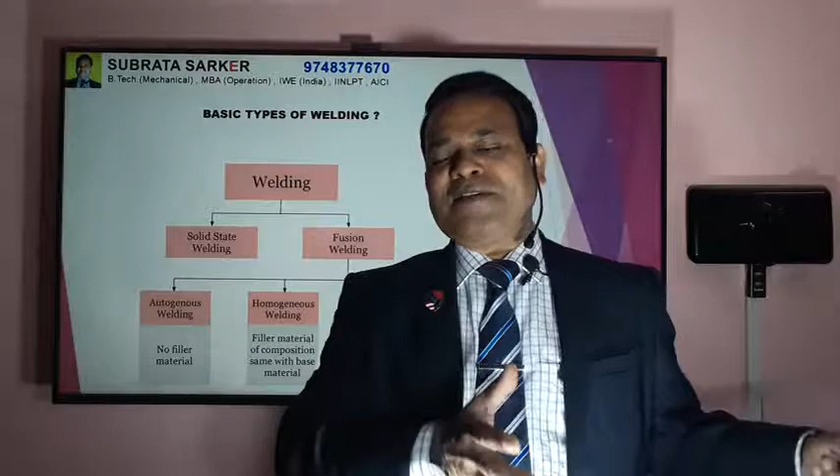Now welding has a lot of types actually, like solid state welding, fusion welding, heterogeneous welding, homogeneous welding, autogenous welding, and also there's non-metallic material like polymer material. It has also got different sub varieties for the welding process, which today we are not going to discuss. We'll be discussing only metallic material welding.

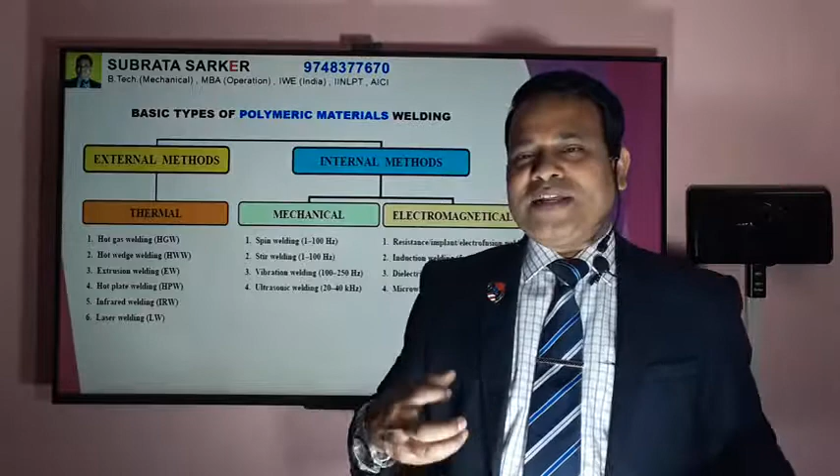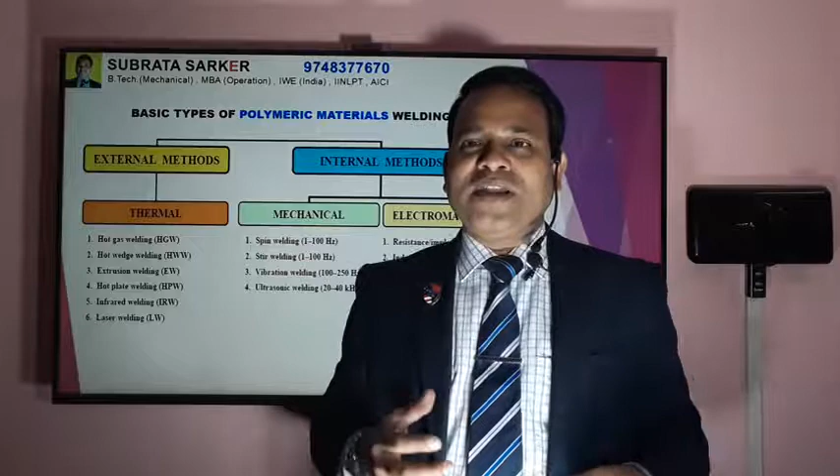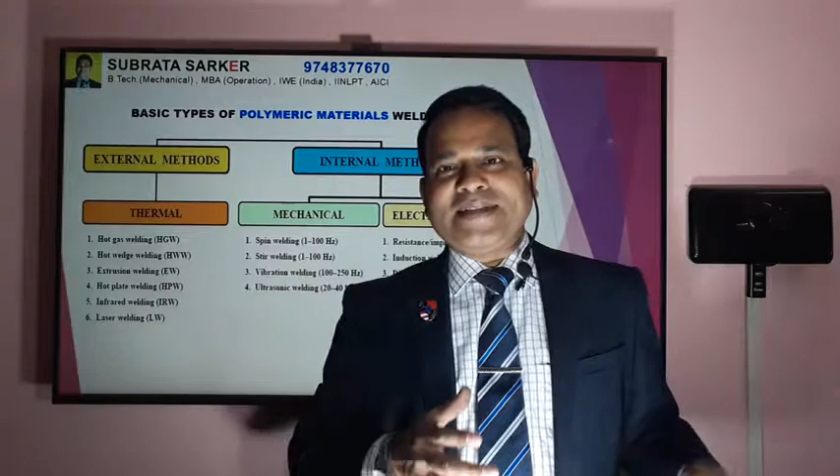Now basic types in metallic material welding: one is gas welding, which is mostly used for sheet metal where joint strength is not much needed, and resistance welding is also very much used for sheet metal applications in the automobile industry, and arc welding is majorly used in the fabrication industry for shipbuilding, for heavy construction, like MIG welding, submerged arc welding, etc. And there are newer welding processes like EBW, electron beam welding, and laser beam welding. This is the special area of application where this welding is used.

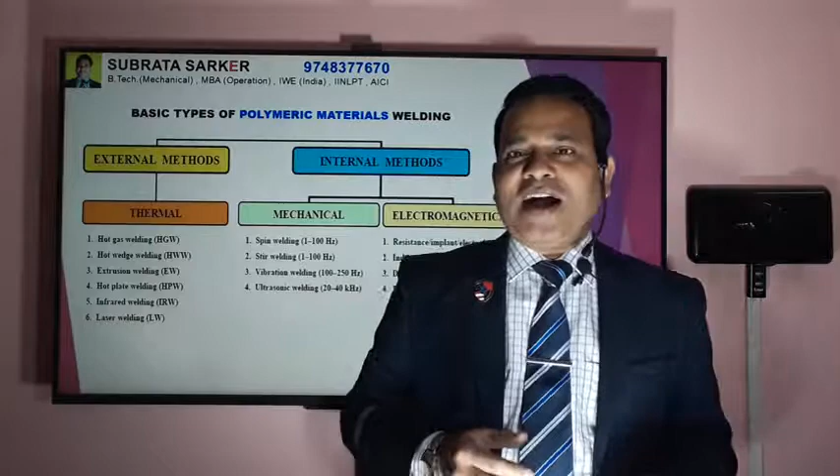And there is another category of welding, called solid state welding, under which comes friction welding, ultrasonic welding, diffusion welding, and explosive welding. I'll be discussing today in detail ultrasonic welding, which is basically a solid state welding.

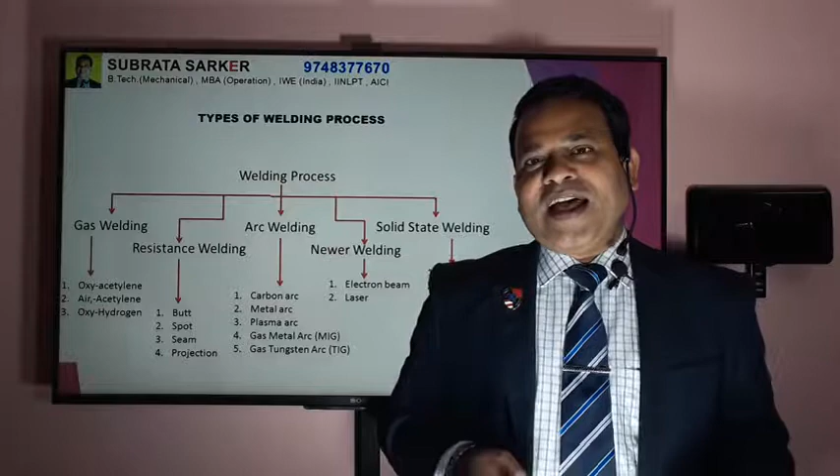Now, before getting into this subject, I would like to share that welding is one of my most favorite subjects among mechanical engineering subjects. Other than my engineering graduation, I have also done a section of BTech from Jadavpur University only on welding technology in collaboration with IIW, and I'm also an International Welding Engineer certified by IIW. And in one of my previous companies, when I was working in Germany, the name of the company was Ultrasonic GmbH, I learned a lot of special welding processes, like friction welding, submerged welding, laser welding, microplasma welding, ultrasonic welding. So today I'll share one of these areas, ultrasonic welding, which you will normally not find in common industry; it is a very special area of application and special category of welding.

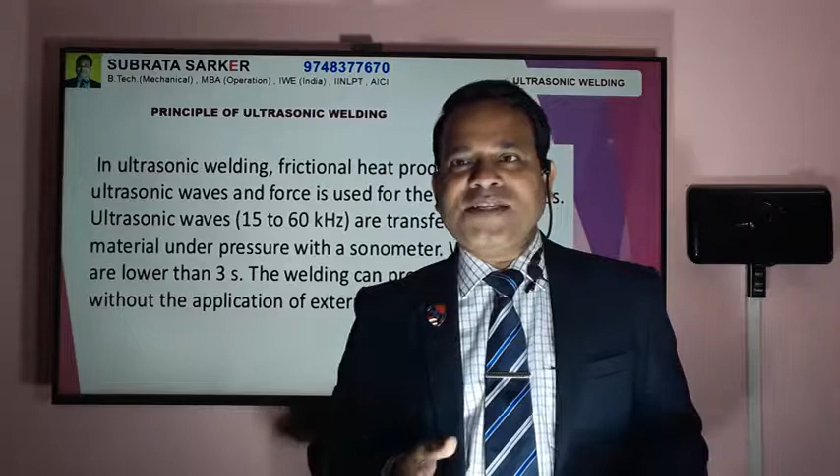And the typical things are a transducer which generates the vibration in the required range, a sonotrode that is needed for ultrasonic welding, an anvil or jaw, etc. So the process is basically: say there are two sheet metals you want to join. You put ultrasonic vibration on the metal, this vibration creates frictional heat, and you put pressure on both metals and they get welded. This is very simple, but it's a very special process, ultrasonic welding, which you'll rarely find in general manufacturing industry.

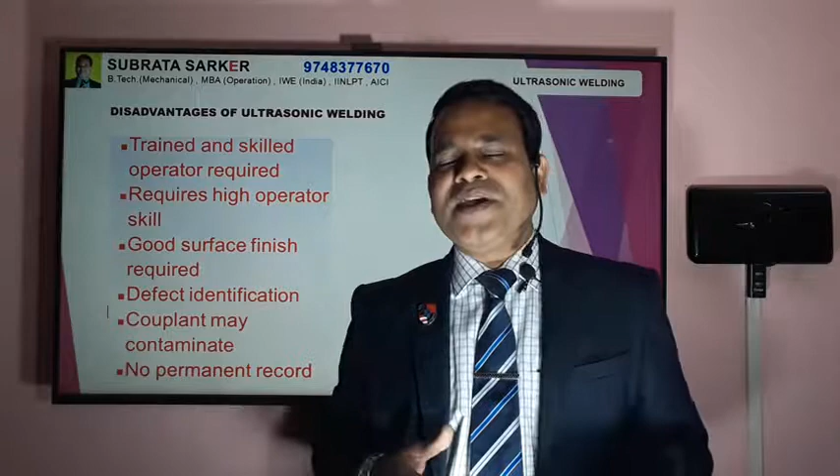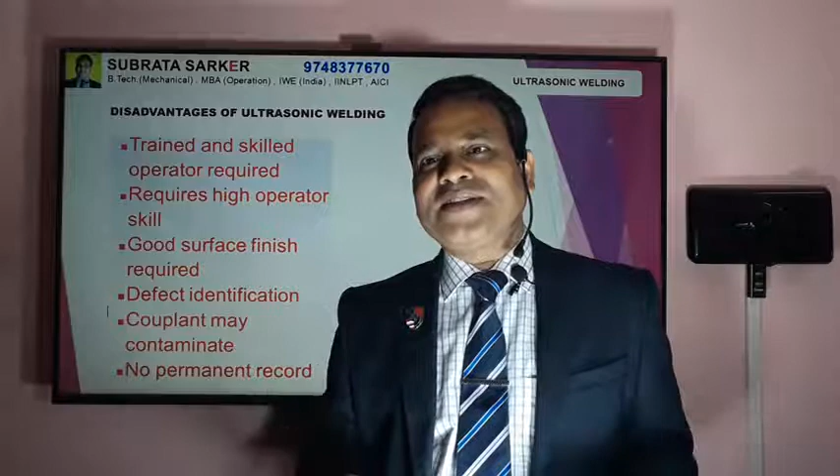But there are a lot of advantages of ultrasonic welding. One is the heat affected zone is very minimum. You can weld very thin metal, like very special containers, sealed covers, etc. And surface deformation is almost nil. With thin material, there is no distortion due to heat, or weld color from heat generation. And there are no defects due to external gases, arc or filler material, because those are not needed in this process. Dissimilar metals can be joined, as I said already.

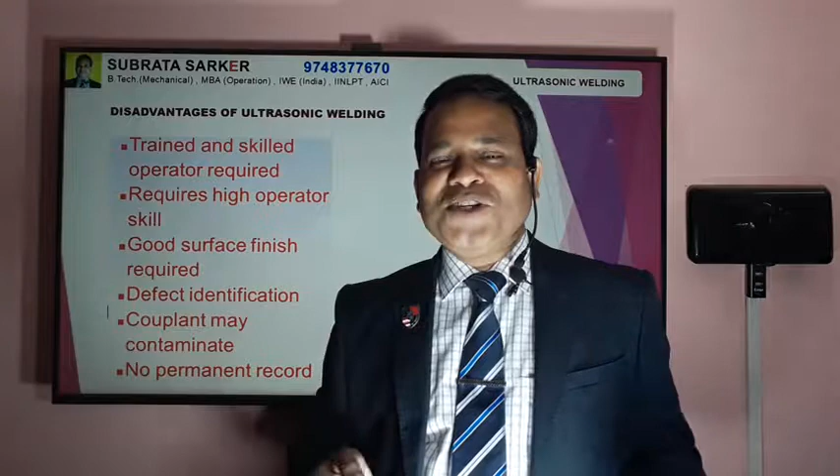But one of the most important unique things actually, glass can be welded by ultrasonic welding. We just cannot think of how glass can be welded by a welding process, but ultrasonic welding can weld glass also.